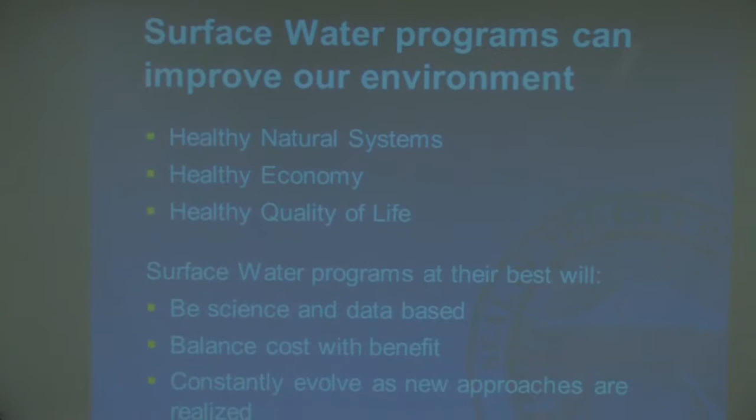So, there we go. I wrote this slide very purposefully, and this statement, I know it's kind of awkward here, but surface water programs can improve our environment, meaning natural systems, economy, and quality of life. And like I said, I was very deliberate about this statement, and I put can in there for a real purpose. That word can could be many words. It might be might, it could be probably, it could be do and does.

And so my point here is that surface water programs at their best will be science and data based. They will balance cost with benefit. They will constantly evolve as we learn new approaches, new science becomes available, and they're realized for application in the field. As a surface water manager, occasionally, I would like to more frequently, I step back from the daily chaos of all the programs that are going on and just think about our program in Tacoma. And does it meet this kind of a standard? Is this the concept that we incorporate into our surface water programs?

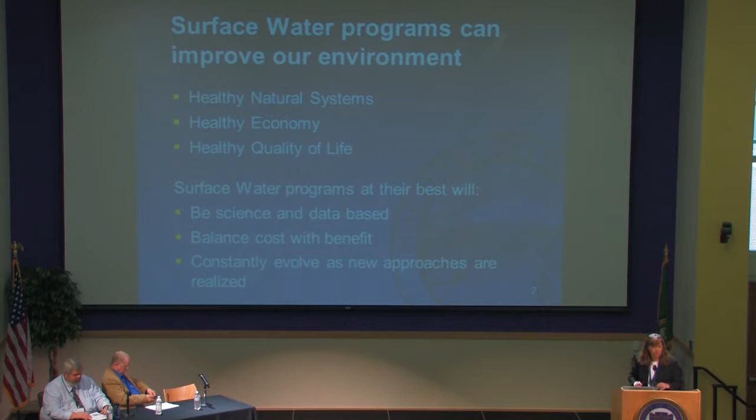And sometimes, maybe you feel this way also, it feels as if maybe we exist to satisfy permit requirements. I don't know, maybe you feel that way, maybe you don't. Some days go like that. But on the other hand, some days go really well, and we're able to move forward and keep the big picture in perspective and develop something really, really cool. And I think a lot of our programs in Tacoma go to the really cool point.

1,500 miles of infrastructure, the pipes, the pumps, are going straight into an asset management program, which is something I am incredibly proud of, but is a big topic for another day. Topic today is, of course, the green infrastructure piece, the LID piece, the treatment piece. And where we're heading in those programs is to retrofits, but retrofits based on science and data. Regional facilities, so that we can improve cost effectiveness.

And we used to have a program in Tacoma, which was the In Lieu program. And my goal, it's not realized yet, but my goal is to resurrect the In Lieu programs, both for treatment and for flow control. Those are programs in which developers can pay into a fund, and then that capacity is provided in the system.

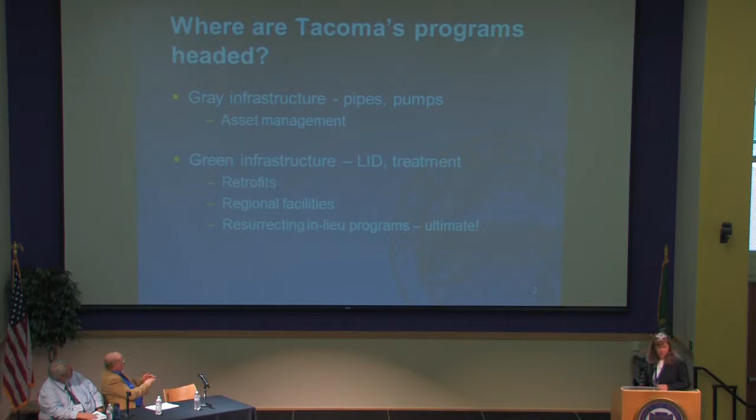So, the evolving practice of stormwater treatment in Tacoma: we've got the current system, which is development and redevelopment requirements. Those are from the manual, and they're imposed on development projects. That generates numerous on-site facilities, which we have to inspect during construction and maintenance, making sure that they're still functioning. But where we want to go is a new focus on regional treatment.

And we want to focus them upstream of Tacoma's most sensitive receiving waters, and I'm talking here about Commencement Bay and the Thea Foss Waterway. By 2015, and this is an amazing number, in Tacoma we will have constructed treatment for 850 acres tributary to Commencement Bay and the Thea Foss Waterway. And so our goal with the surface water utility is to leverage that treatment capacity to support development and redevelopment. And so staff in Tacoma will be pursuing an in lieu of treatment program.

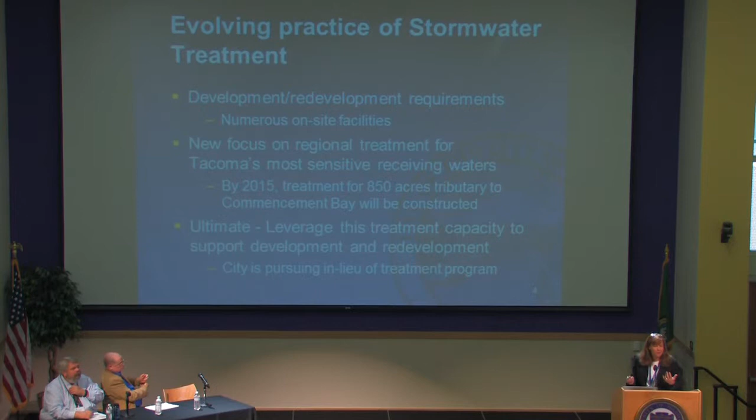And so we've built capacity for treatment, therefore the idea might be that we could accept funds from developers and thus build additional treatment capacity in additional areas of the city with other sensitive receiving waters downstream of areas that are of concern for the land use or whatever.

So how about flow control? Flow reduction. Again, our classic program is the detention ponds, development and redevelopment requirements.

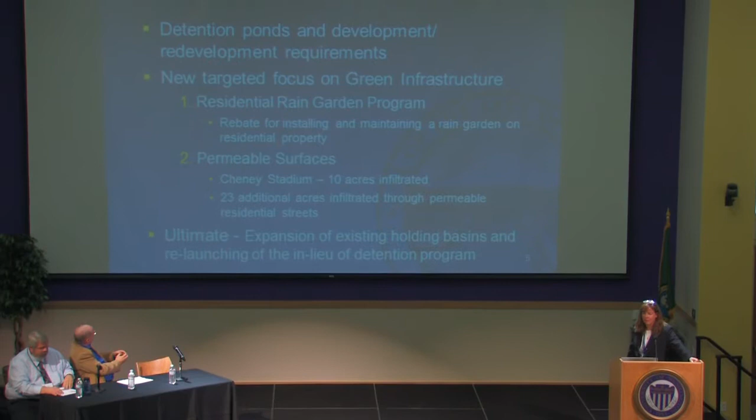But in Tacoma, we have a couple watersheds that are really capacity constricted. And they're the ones that discharge down to Flett Creek and Leach Creek. And so we can expand the infrastructure for sure, dig out the holding basins and all, but we really also need to reduce the flow.

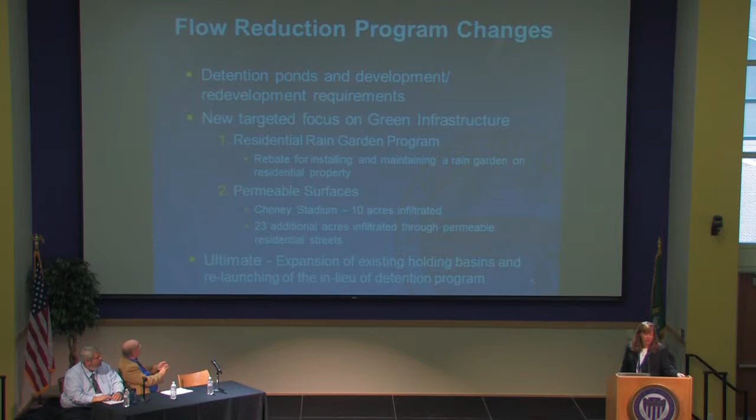And so we've initiated 2 pilot rain garden programs, which were in the TNT. You may have read about them. One is a residential rain garden program, and if you're in these 2 particular watersheds, we will assist you in putting rain gardens on your property and provide you a rebate up to $2,000 to do so. I think we have 4 actual participants at this point.

And it was an offshoot of a pretty big initiative, Healthy Homes, Healthy Neighborhoods, that the Pierce Conservation District spearheaded. And we hope to expand that program in the other watersheds of Tacoma, which are not capacity constricted. We certainly want to promote this program and intend to provide design assistance and soil testing and that kind of thing. But we're really focusing our efforts, not everywhere, but targeted, focused to what the challenge is and what we want to fix.

So anyway, in keeping with the flow reduction, we've also really stepped out with the permeable surfaces. Cheney Stadium, also in the Tacoma News Tribune, an article, and that is quite a cornerstone project. It's 2 phases, and 10 acres of that site is now infiltrating, and that's quite a big deal. In addition, in that area, we have 23 additional acres which are infiltrated through permeable residential streets.

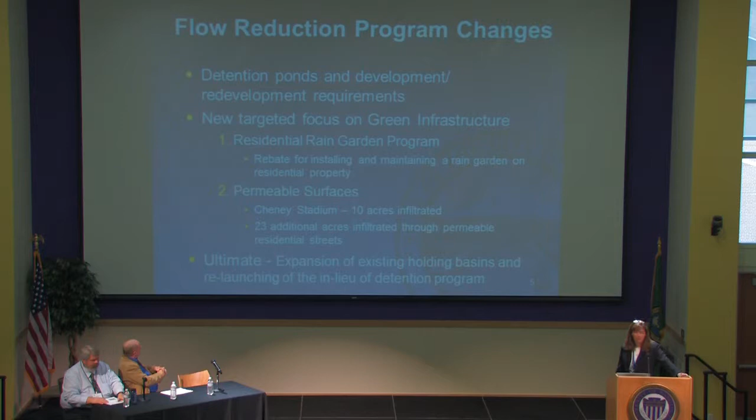So it took Tacoma a while to actually build some permeable asphalt surfaces that cars travel on. But now we've got a few, and we're going to see how it goes. So far, so good. But ultimately, we do have a plan to expand some of our holding basins and again relaunch the In Lieu of Detention program to assist development and redevelopment in Tacoma, and that would be focused again in the Flett and Leach watersheds which discharge to creeks.

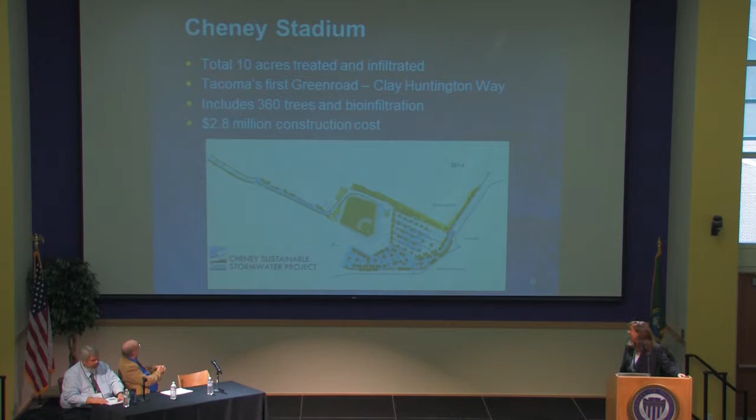So we talked a little bit about Cheney Stadium, and here's a diagram of it. This is a project that is in its 2nd phase, its 2nd year of construction. The blue areas are the permeable surfaces. There's also a lot of trees that were planted, bioinfiltration at $2.8 million construction cost. That was for the full 2 phases of it. Project manager for this project is Jessica Knickerbocker, who is in the audience if you care to have more information on this particular project.

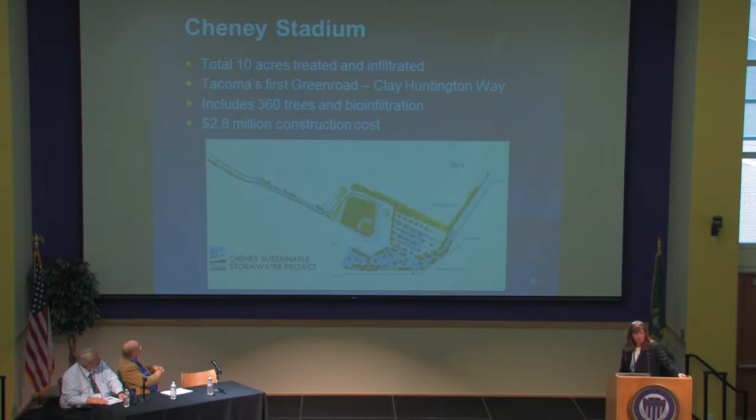Second one I'm just going to touch on here. This will be on the tour tomorrow morning. That's the Pacific Avenue streetscape. I will say that, just to back up here, the Cheney Stadium project is an example of targeted flow control. Sure, there is treatment because the water's going into the ground, we never see it again. But the focus in Cheney, which discharges into the Flett Creek system, is really flow reduction. It's at the top of the watershed, we want to get rid of it. We want to be smart about how we're attacking this stuff, and so this is really flow control based.

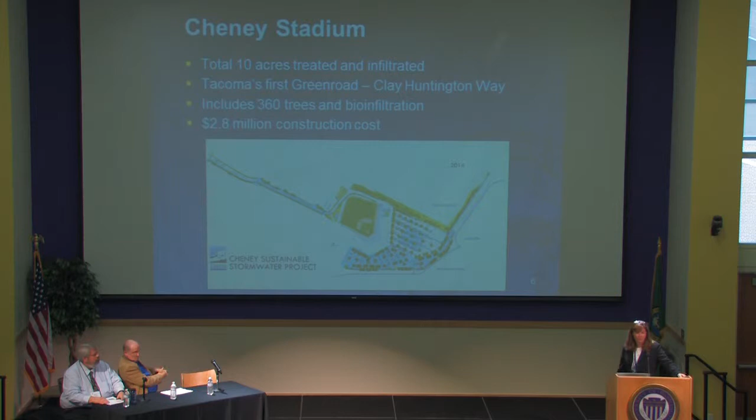But the next one, Pacific Avenue Streetscape, is upstream of the Foss Waterway, and it is really treatment based. It's a treatment retrofit for 5 acres of Pacific Avenue, installed 14 rain gardens, plus some trees and silva cells. That's the first time we've tried those in Tacoma, and we're hopeful that we'll get amazing big trees there. Construction cost, $2.4 million, and this is really a gateway street in Tacoma. It's our main street, if you will.

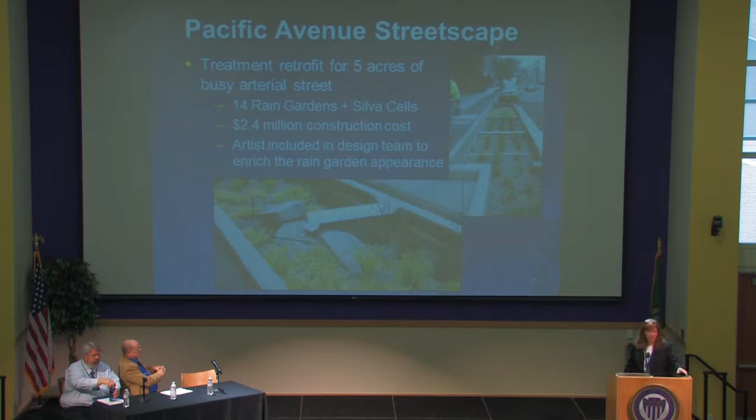And an artist was included in the design team just to add to the form, to make it pleasing and interesting. And when you get on the tour tomorrow, if you are here and want to come, you'll see channelized steel. You'll see some old recycled granite blocks that were actually extracted from city streets, put in these rain gardens, and then of course the plants. And I think there's a green flash or something that's supposed to go in, but I'm not sure if that's quite installed yet. But anyway, that's Pacific Avenue.

So I just want to close kind of with the rationale for going to regional facilities to the extent that we can and where we find opportunities in Tacoma to do so. We want to target those to our most sensitive watersheds and receiving waters. The regional facilities, of course, can enjoy some economies of scale, and we intend to organize them and construct them to support development through a pay-in or an in lieu program. That's a goal. That's the ultimate, just making that clear here.

And so if we are successful, which is not only up to me, but there are regulators who will care about this, we can provide developers with certainty regarding requirements, costs, timelines. So that's my comments.

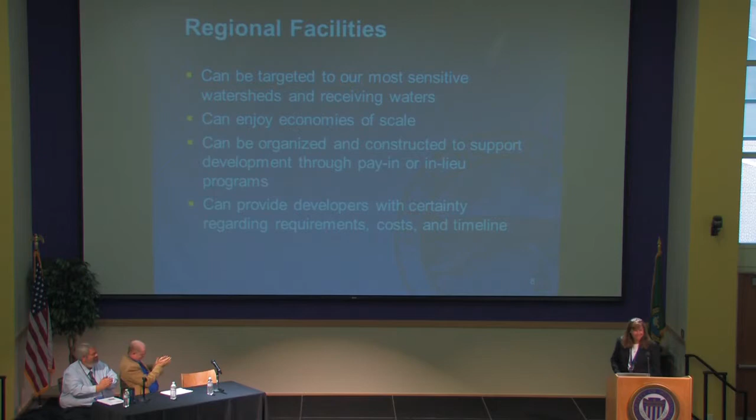My name is Art Castle. I'm Executive Vice President of the Building Industry Association of Washington. Been here almost 3 years, and prior to that, I spent 17 years as the executive of the Kitsap Home Builder Association, where I really got involved in low impact development.

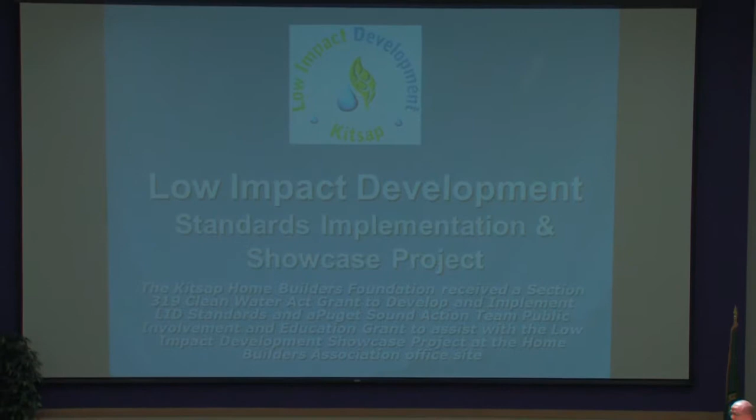A couple of projects we did while I was in Kitsap through our foundation is we had a Section 319 grant to develop low impact development standards for our 4 cities and the county, and we did a several-year process where all the stakeholders, including the tribes, the jurisdictions, private sector, civil engineers, health districts, everybody else was involved in that, and we adopted and created a design manual that was adopted by all 5 jurisdictions without editing. So it was a very successful project.

And along the way, one of the things we did, we had what was then the Puget Sound Action Team PIE grant, and we took a $40,000 grant and did a $200,000 retrofit of the Home Builder Association office, where we excavated everything on the site except the building and retrofitted it, bringing in many of the low impact development techniques to give a showcase of these projects.

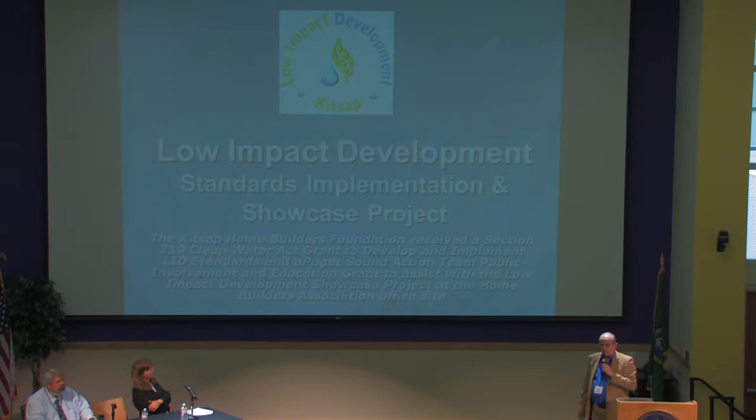One of the things that we found in Kitsap is that by having the project done the way we did, it became the tools of choice in Kitsap County. I liked when I was there calling Kitsap County the low impact development capital of Washington. It wasn't because any jurisdiction was more advanced than some of the other jurisdictions around Washington, but it was a place where all 5 jurisdictions in the development community, everybody was on board and learning how to do it, plus the acceptance in the regulatory process. So when you brought a plan in the counter, you could actually get it done.

So I'm going to talk just some basic stuff here real quickly, and why I think it's exciting. It's exciting and great tools for stormwater mitigation. Stormwater mitigation, you'll probably all recognize, I know from the business side, is the single largest mitigation on any development project. It's most costly. But it has some good things on it too, and I'll talk about this.

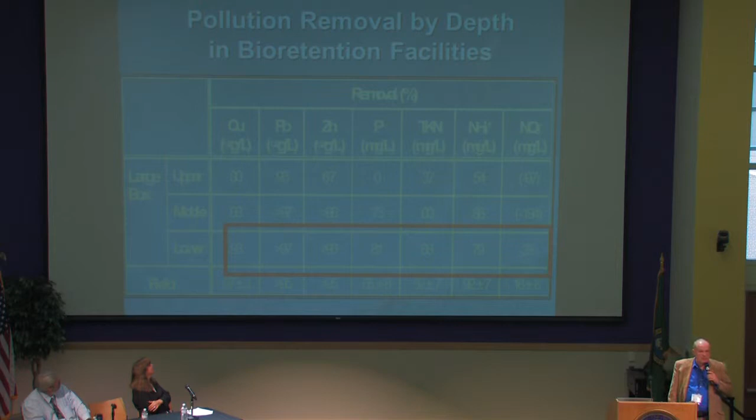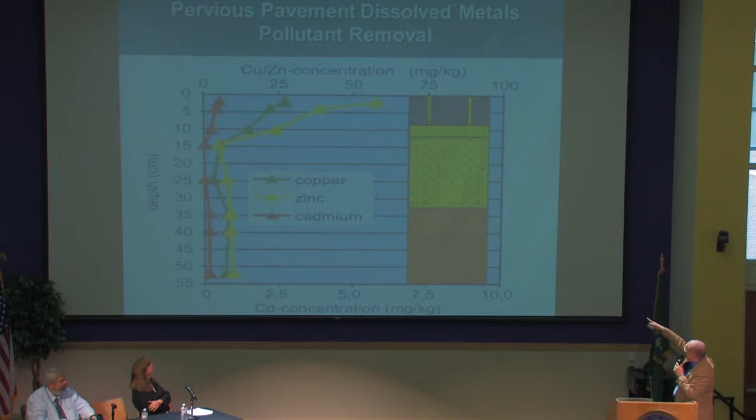Our science, this is some bioretention. The red area shows some of the effectiveness of the pollutant removal. You've seen some other speakers talk about that previously. This is a European university who did some mitigation on dissolved metals, on pervious concrete, pervious with the aggregate base, and as you can see, by the time the water gets back into the soil, it's back to background levels. Very effective at treating that.

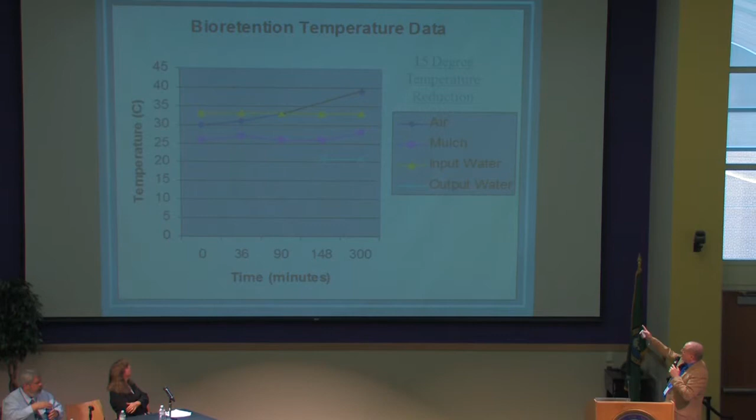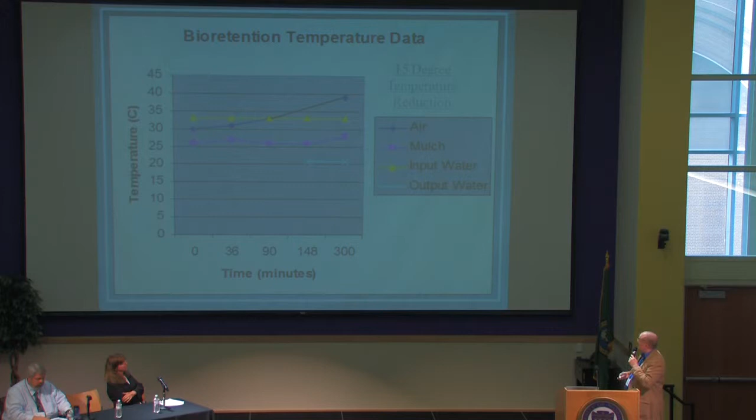Also, bioretention also reduces water temperature, so if you have the natural seep back into a wetland or stream, you're actually now having both the seep instead of the pipe at the end of the pipe, but also the right temperature going back in for the animals and the insects and what have you in that area.

And the work that WSU Stormwater Center over here in Puyallup is doing, the science that they're doing with those, you got to see the pervious pavements and the bioretention. The science that they're going to provide, Department of Ecology, will dictate the regulatory benefit that those techniques are going to provide in the future. So that's something to keep in mind and keep alert there, because it's a very important process. It's probably the best science that's being done on low impact development in the country.

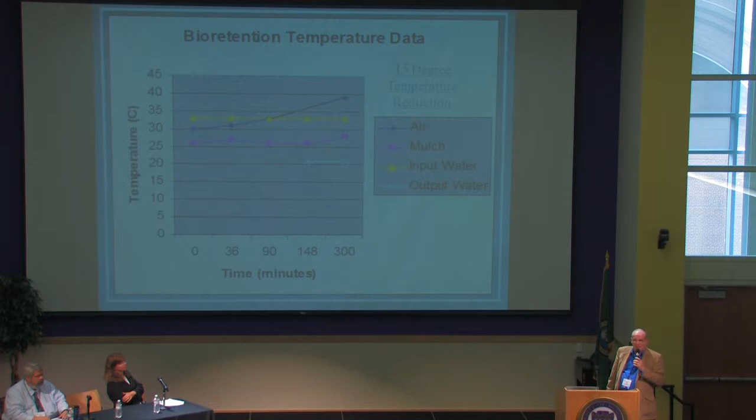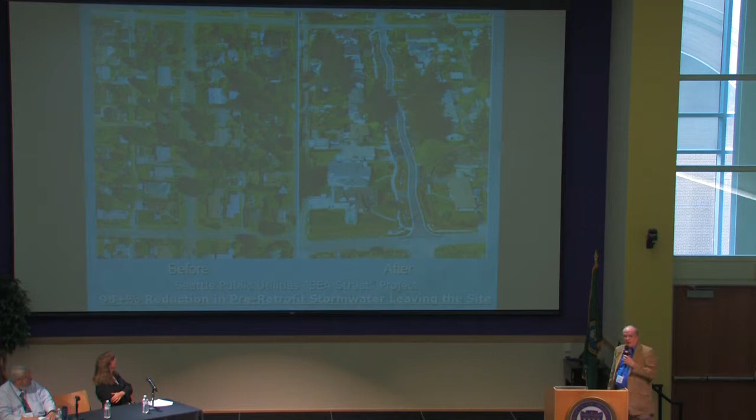So why low impact development? We're essentially wanting to treat a developed environment hydrologically like the pre-development. This is the Seattle SEA Street project, done probably a little bit over 10 years ago, where after they did it, over 98% reduction in stormwater runoff.

So why was it conceived? They're sort of new technology, not the old BMPs. It can reduce the cost of stormwater infrastructure. And one of the things I found in the development community, that when the site accepts it, when the site's appropriate, most every project you can reduce the development cost by using low impact development rather than conventional stormwater BMPs.

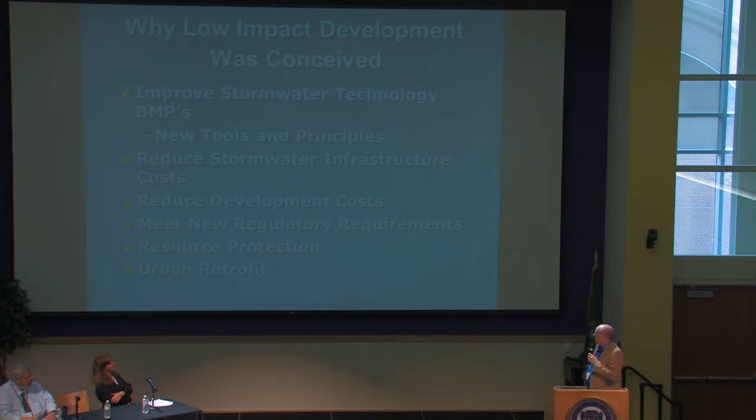I mentioned that it meets the new regulatory requirements, and I'll mention a bit about that. And Damon, who's coming after me, is going to talk a little bit about the NPDES requirement for jurisdictions. But it's also resource protection and can be used in urban retrofit.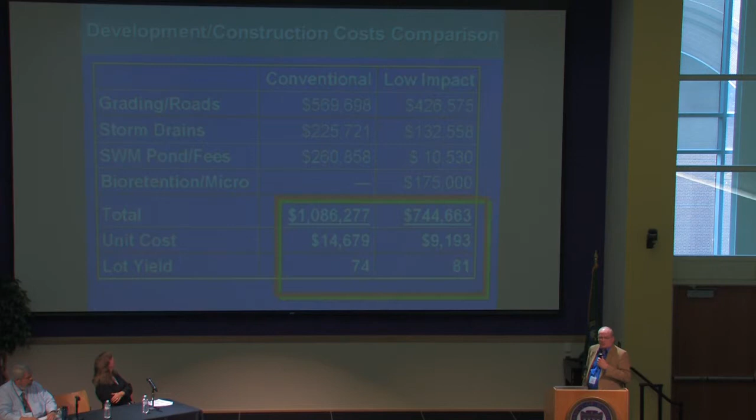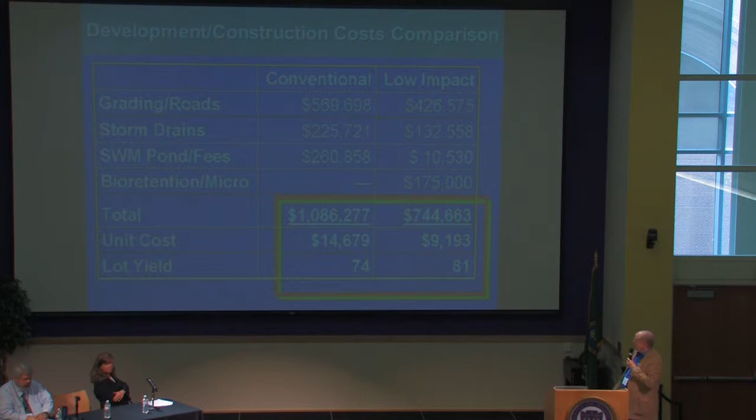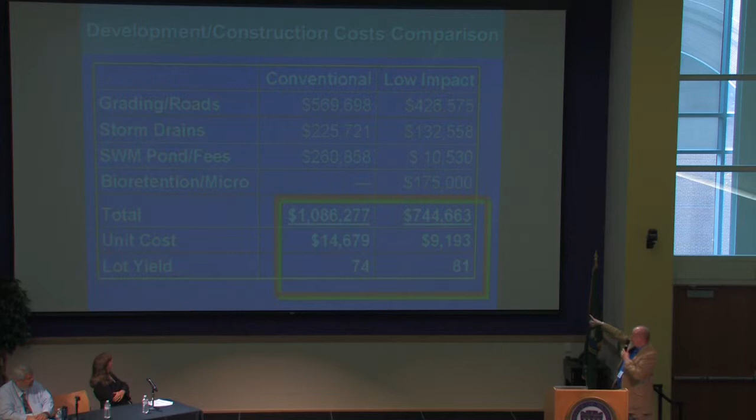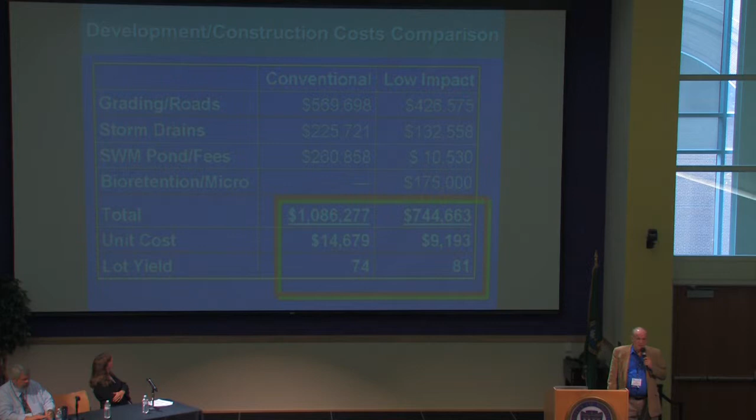This shows a cost on a project done in Maryland several years ago. And I think for a residential developer, this is a very important thing. Using conventional BMPs, this project had about $14,000 in stormwater development cost per lot and got 74 lots. So using low impact development, they were actually able to get 81 lots at a $9,100 cost on stormwater. That's a little bit dated and from Maryland, but the point is that for most projects, especially where you can infiltrate into the soils, there's the potential of reducing net development cost.

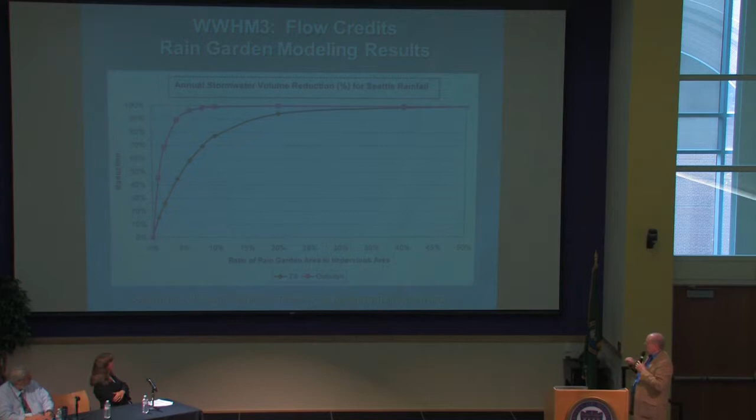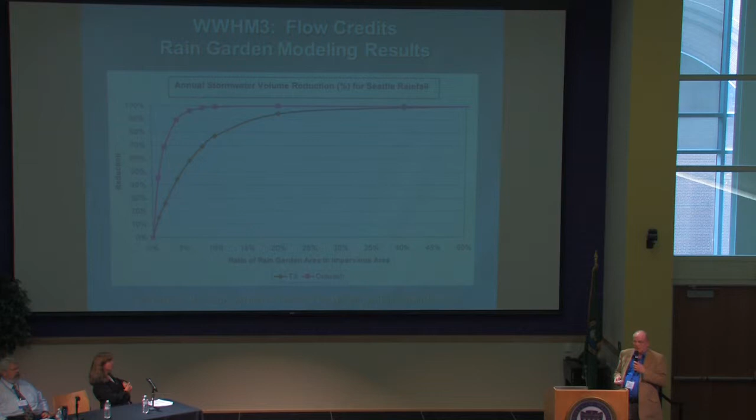This is something that I think most of the engineers, when I was doing the Kitsap project, really got interested in. This shows the ratio of a rain garden area to impervious surface. This was some of the engineering that Curtis Hinman did when they put out the rain garden handbook. Essentially what it shows is, if you've got till soil, sort of difficult soils, and you put a rain garden of 20% of the area of your impervious surface on your site, it'll handle about 95% of the rain that hits your site in a year. And if you've got good soils, at about 10% you get essentially 100% infiltration. It shows you how effective a rain garden can be on volume in addition to water quality.

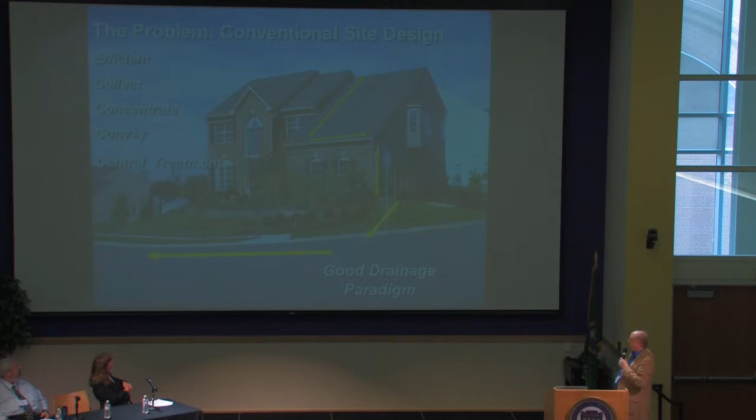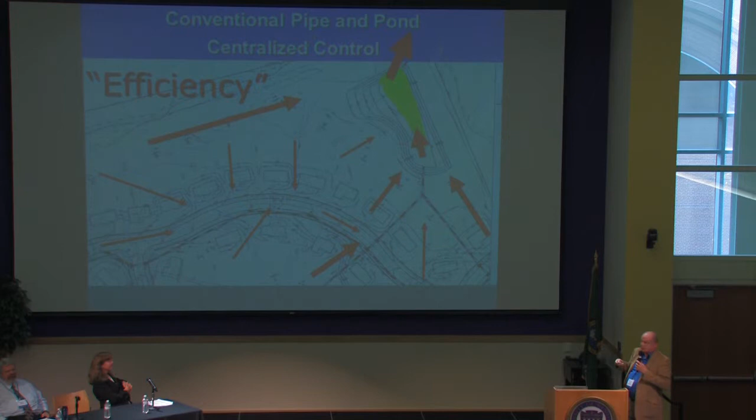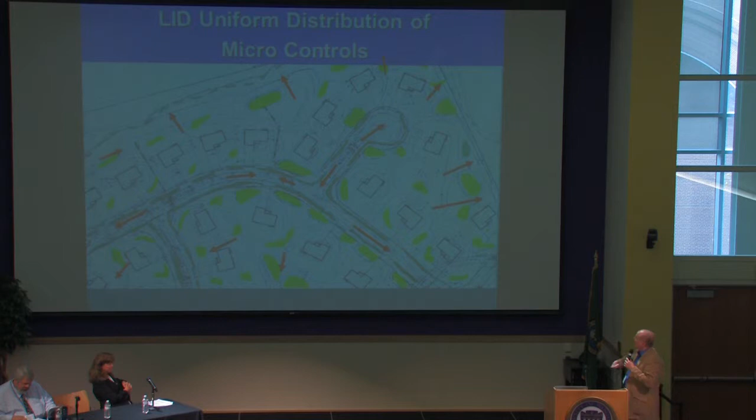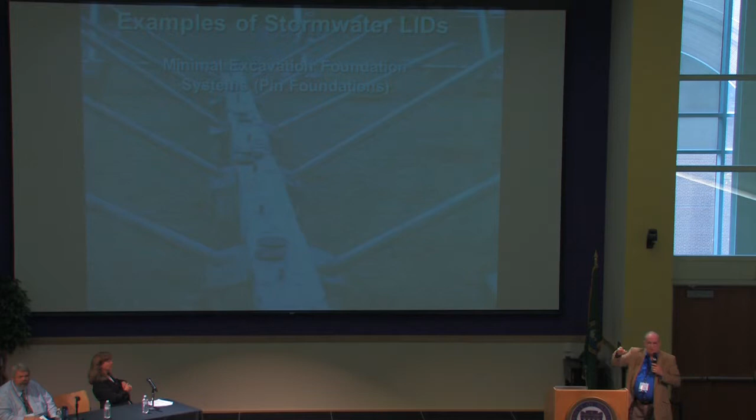Rainwater harvesting: if you are able to do a water budget where you look at the cycle during the year of when rainfall comes in, and then how you're going to use it, and you can zero that out, your roof is then treated as if it's landscaping, not impervious. That's how it's mitigated. Minimal excavation foundation, where you remove the vegetation but leave the topsoil, which is very effective in dealing with volume of stormwater. It's a very effective technique.

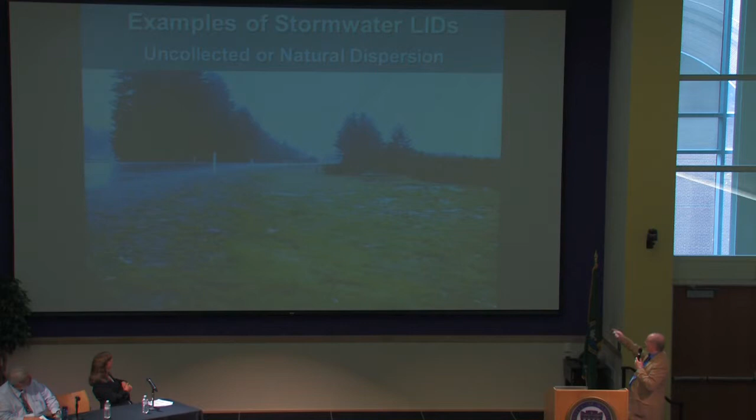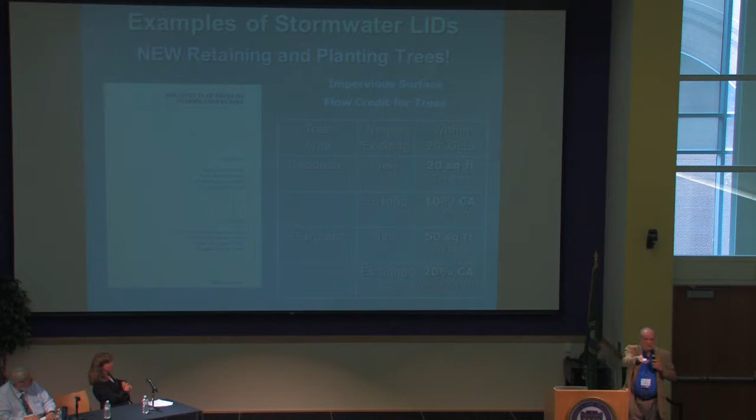Vegetated roofs, surface dispersion. There's a new technique that Ecology's approved recently, and that's a tree credit, where you get credit for the canopy area of your existing trees, or if you replant, you can get some of that. What that does, to the extent you're allowed to use it, is reduce the amount of impervious surface you have to mitigate. These are a couple of things I want to cover in a couple of minutes, and Damon's going to talk a little bit more.

But all Phase 1 and Phase 2 jurisdictions in Washington, that's about 80-some jurisdictions in Western Washington, must now require low impact development where feasible. And each jurisdiction over the next period of time, generally based on their mandatory comp plan update, is going to have to integrate low impact development in all their development regulations.

But the regulatory issues and feasibility: the mandate is requiring low impact development with a hierarchy of BMPs where feasible. And unfortunately, low impact development doesn't work on every site. It can't infiltrate. Sometimes you have soil types or soil layers. These vary by BMP, but infiltration rate of soils, depth of water table, soil suitability, slopes, among others, are some of the feasibility criteria built into the regulatory environment.

One of the things I'll say on that is that I'm a big fan of low impact development. I'm concerned that the mandating, especially on the prescriptive path, could well lead to people who don't know enough designing, or a regulator who may not be familiar enough with low impact development in the science and engineering aspects, and getting installed and having failures. And the failures being blamed on low impact development when it was the mandate, almost a blind mandate. And I have a little concern about that. But time will tell how that works, and I'll answer any of your questions later.

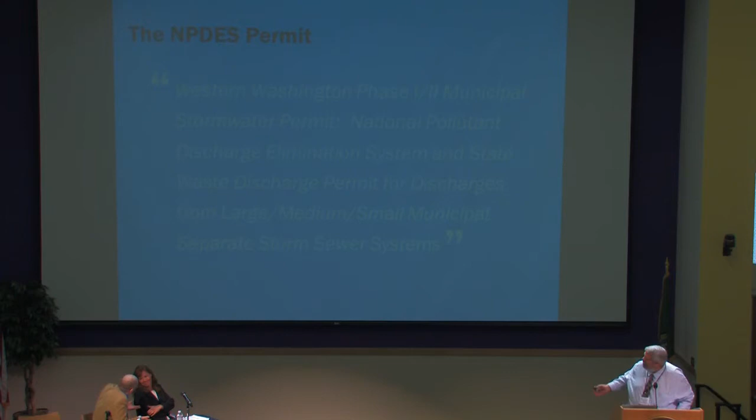It's going to be coming from a local government perspective, but it's also going to be thinking about community impacts down the road, and try to identify business opportunities, potential for jobs and economic development as a result of the permit. It's a little bit different take than you sometimes get on the permit. We hear a lot about how new regulations can stifle development, but there's a lot of new stuff going on with this permit. The permit itself is pretty complex. I mean, even the name of it is complex.

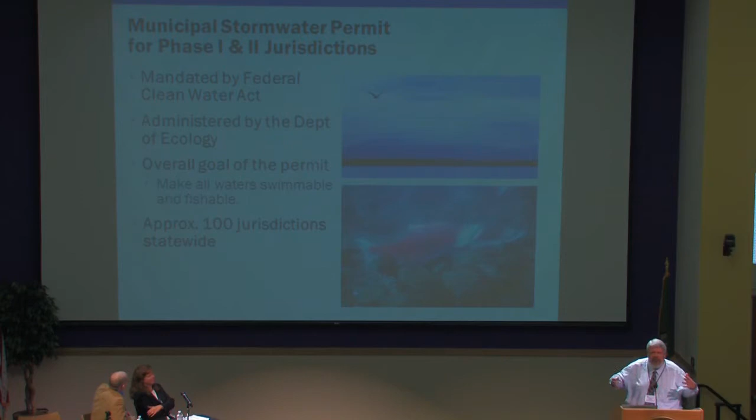So I suspect that most of you know that this is a federally mandated requirement, the NPDES permit that the state puts out and gives to local governments. That's a result of the Federal Clean Water Act. These permits and all this stuff that we're finally doing was anticipated in the 70s. We're finally getting around to it. As I mentioned, the name's complex, but the permit itself's got a real big thud factor with it. The permit's 70 pages. It's got a bunch of appendices attached to it.

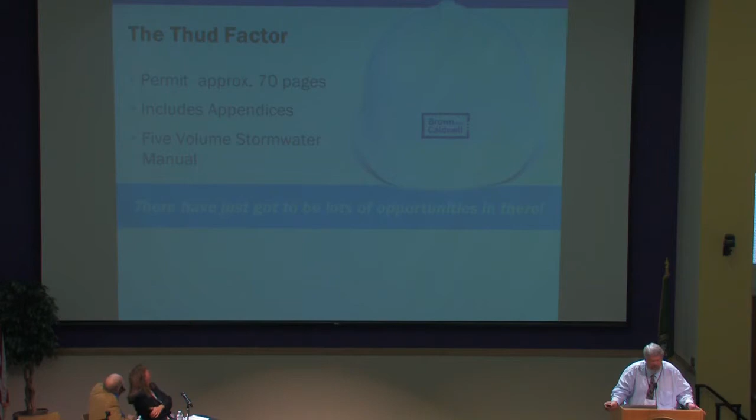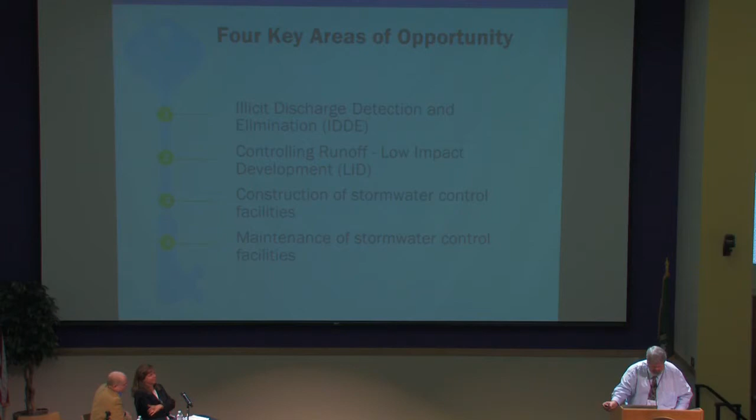There's a 5-volume, 1,000-page stormwater manual. There's an LID manual, a rain garden manual, an O&M manual, a land use principle guidebook, and there have just got to be a lot of job opportunities and economic development potential in all that stuff. So when we start taking a look at it, we see that there are at least 4 main areas where we can look for that kind of opportunity. One is illicit discharge detection. Another is controlling runoff and low impact development, which we've heard quite a bit about.

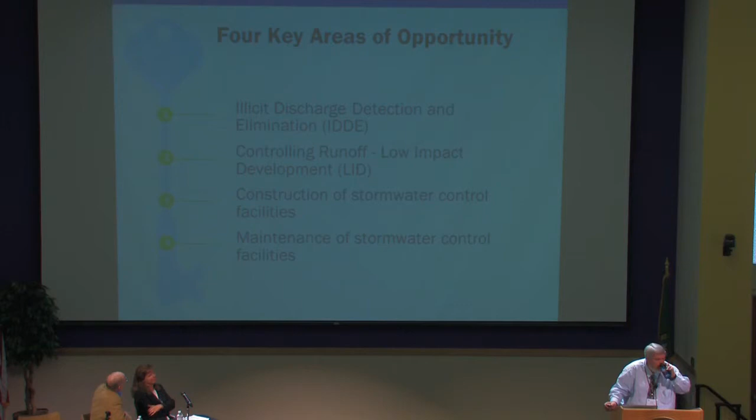Construction of stormwater control facilities, and maintenance of those stormwater control facilities. My big caveat is, as we speak, negotiations are going on with appeals to the permit. Your mileage may vary, but what's happened in the past with appeals is the body of the work stays pretty much the same. We change some things around the edges, we might delay some things, but in general, this stuff is coming to a neighborhood near you fairly soon.

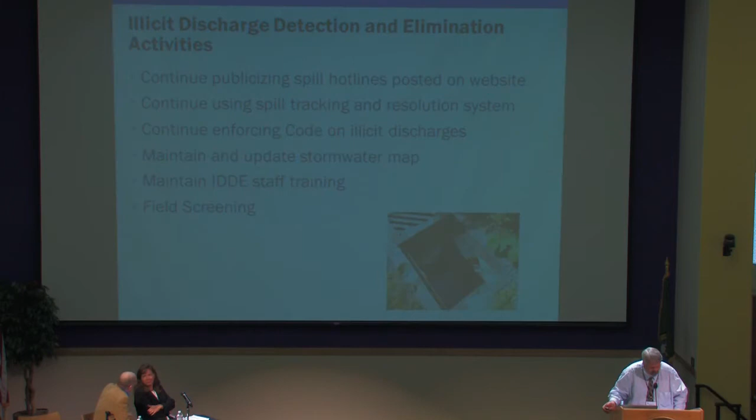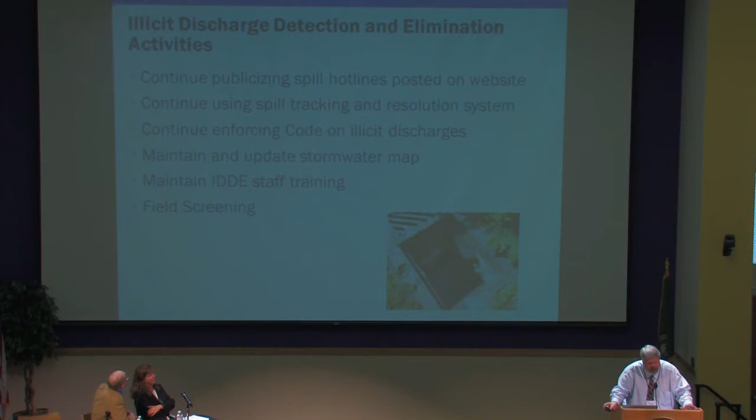With illicit discharge detection and elimination, most local governments are doing a lot of this stuff already. I won't talk about the continue part. There will be some opportunities for private sector jobs and firms that do stormwater mapping. There's going to be opportunities for illicit discharge detection and elimination training. And there may be some opportunity for field screening, particularly with some of the other maintenance kinds of things I'll be talking about later on, where we can expect some private enterprise participation.

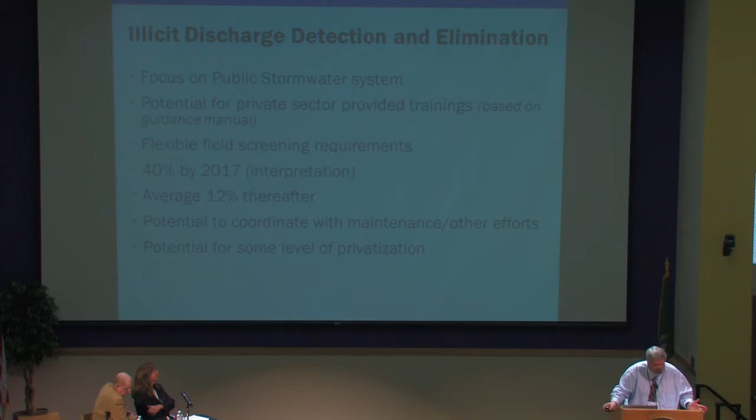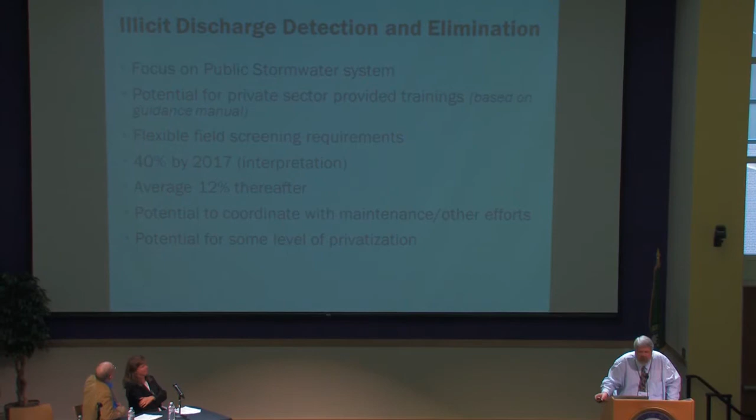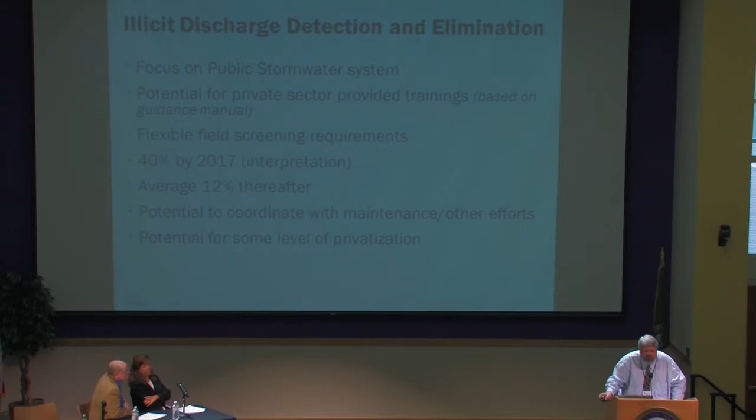With the illicit discharge detection and elimination, of course, we're trying to track down pollutants and remove them. There are the new flexible field screening criteria, and the local government, from a policy perspective, needs to think about what inspecting or surveying 40% of their system by 2017 means. Is that 40% of your catch basins, or 40% of your pipes, or 40% of the land area that drains to it, or, now we'll get tricky, 40% of the inch diameter miles? What is it?

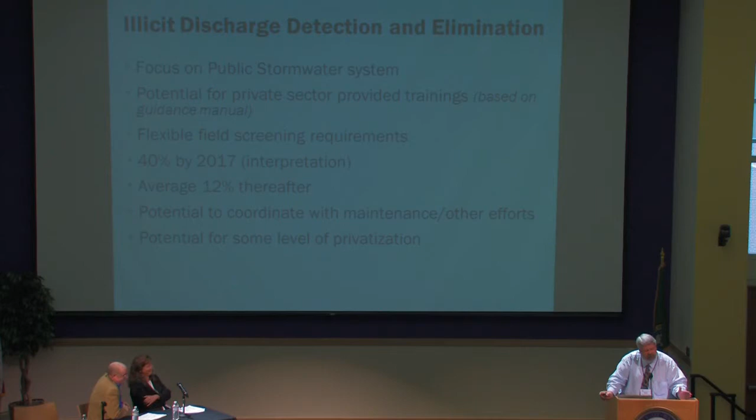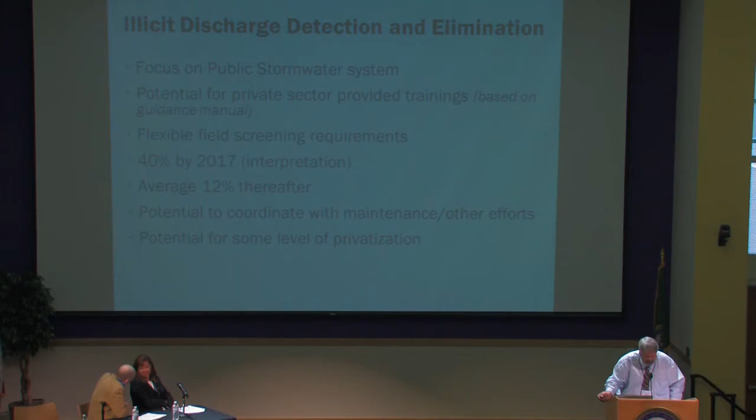And so what you need to do as a community, as a local government, is step back for a second and think what makes sense for you, both in terms of what you can afford over time and what gets you to the basins you want to get to. There are a lot of different ways to look at it, and there is going to be some potential for some level of privatization in some of that work.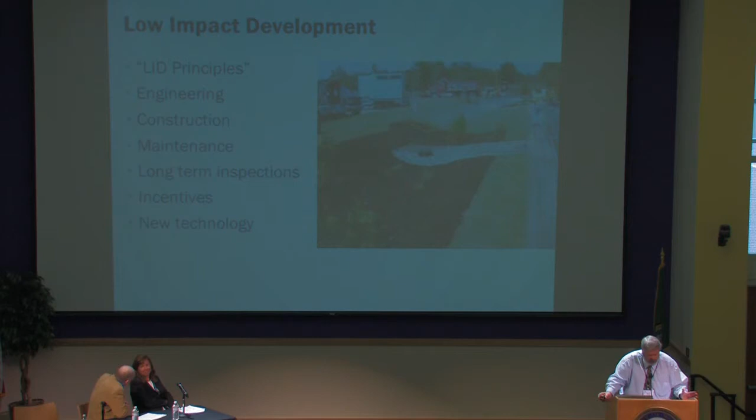Low impact development is really the linchpin of the new permit from where I'm sitting and from what I hear from our clients and what we work with our clients on. All of these elements present some kind of job opportunities or business opportunity, from the LID principles to the engineering to construction, maintenance. All of these and the new technology have some level of economic development interest. On the other hand, the LID principles are truly, I think I heard the phrase, a real paradigm shift. This is a change in philosophy.

That wasn't working. So what we're talking about now is a real shift where before we do our planning, before we do our comp plans, before we do our zoning, we figure out what the impacts are going to be to the water resources and try to figure out how we can set up our structure around that. It's a real shift. And as a result, there are going to be some really interesting policy decisions for local government. Things like trading off parking standards and perceived economic development associated with big parking lots against vegetation preservation, skinny streets, minimizing impervious surface and runoff versus having roadways that are deemed safe to travel on and allow for emergency medical access.

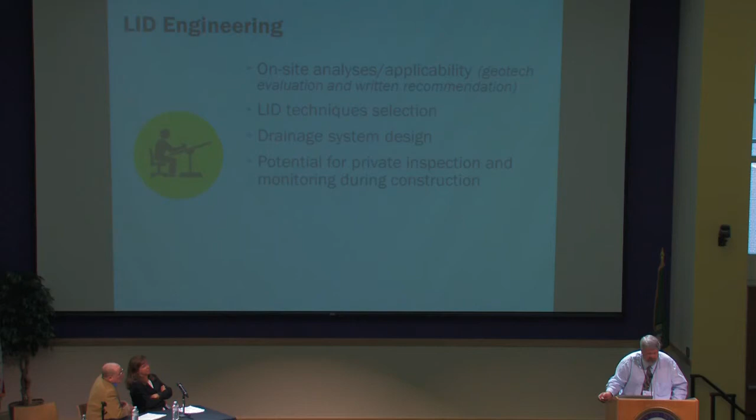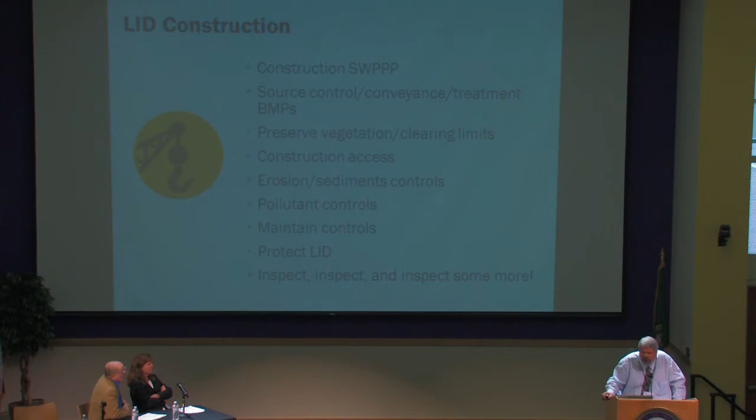There are a lot of things that you have to figure out as you're trying to implement LID and do your drainage system design. In LID construction, we're going to be having more stormwater pollution prevention plans developed as part of the construction. We'll have to keep doing source control, conveyance, treatment, best management practices. We're going to be more careful about how we preserve vegetation and how we mark those.

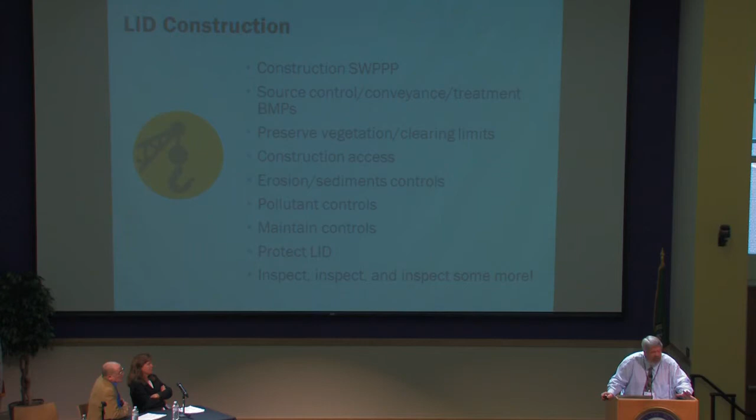We're going to have pollutant controls and maintenance controls. We're going to have to maintain them. We're going to have to protect the LID systems as we build them, and we're going to inspect, and we're going to inspect, and we're going to inspect some more. And with that, we're also going to have a whole bunch of LID maintenance. All of these things, it's kind of new maintenance techniques, and it's going to involve significant increased effort.

And we need to think about how we're going to do that, and where are these people going to come from who are going to do all this maintenance? Remember, we're looking out 50 years, and every property's got one of these, and every property needs to be inspected. Where are these inspectors going to come from? Who are they? Who are they going to work for? Are they going to work for private industry? Are they going to work for local government?

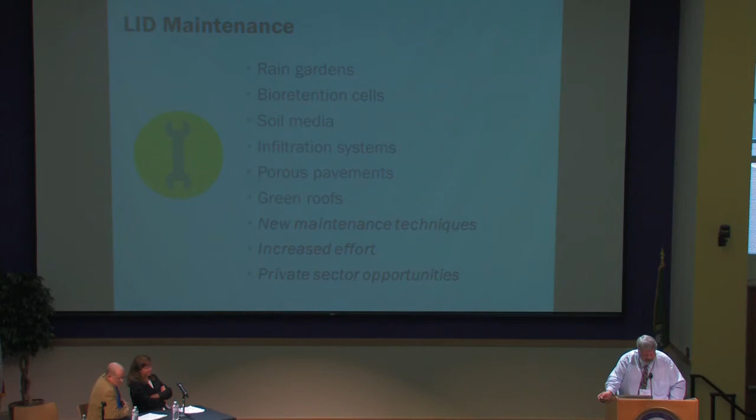Local governments are going to... When was the last time you heard a local government say, "We have plenty of inspectors, thank you"? That ain't the way it is. They are already maxed. This is new stuff. This is new jobs. These are new people. Long-term inspection, it's just going to be a huge, huge new work effort when we start looking out and doing some strategic planning out to the horizon.

So for long-term inspection models, we can look to other industries. In the wastewater sector, we've got the fats, oils, and grease program to keep from plugging up our sewers and backing sewage into our buildings. We've got water supply backflow prevention programs that have been in place for years. And in stormwater management, a whole bunch of jurisdictions around here have been doing private drainage inspection.

But there are a lot of options as we see how all of these things are done across the U.S. Is it going to be done by the public sector? Are we going to privatize some of it? Are we going to allow for self-certification where property owners go out and look at their system and say, it's good? Are we going to do combinations of these? And there is potential for a lot of privatization opportunities. And also we have to figure out how we're going to pay for this. Does this come out of stormwater rates?

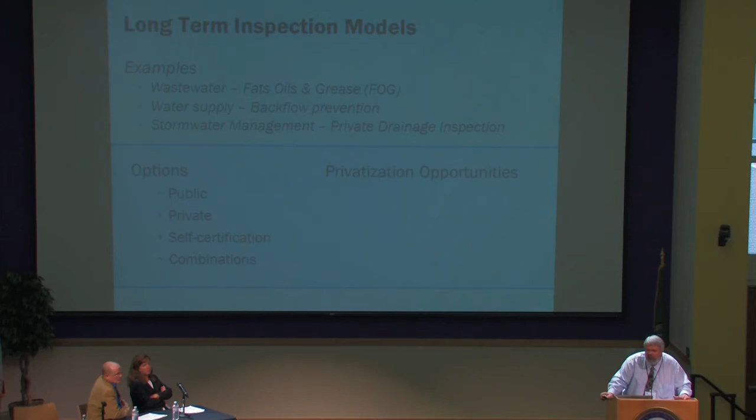Do we do an inspection fee? Do we put surcharges on drainage systems and their drainage rates if they don't maintain them properly? How are we going to do all this stuff? A lot of policy decisions.

For long-term inspection and all these technical people that are going to be needed, there are going to be huge training needs, and there are going to be a lot of ways that training can be given. Eventually we're probably looking at moving toward some kind of a stormwater technician certification series. How do we do that? Is that going to be through the state's trainings, their public trainings? Is it going to be through colleges, universities, private companies? What's going to happen?

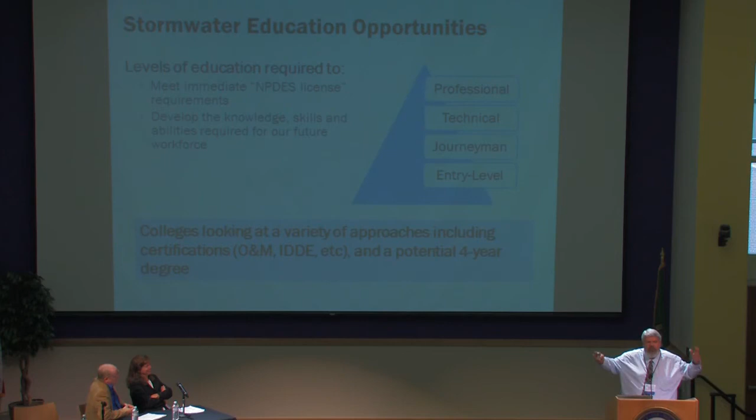I can tell you where some people are trying to get out in front of this now. Some of our colleges are taking a look at the need to come up with an NPDES license, for lack of a better term. The colleges are looking at a variety of approaches and starting at the foundation of all this stuff. I mean, planners and policy people, we're figuring it out. But at the foundation, there are people out there who have to maintain, operate, construct, and manage these things in the field. And those folks are going to have to get some training.

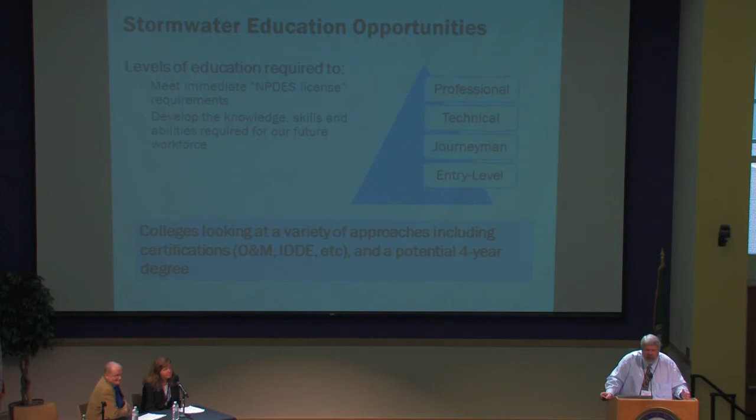And then this slide shows them as journeymen. I think a lot of our jurisdictions call them skilled workers, folks who direct the other work, plan it. They're going to need to be trained. We're going to have more technical people that need to be involved, and we're going to need to bring on a new generation of professionals, of engineers, of stormwater managers who are going to be trained and ready to go with this new reality.

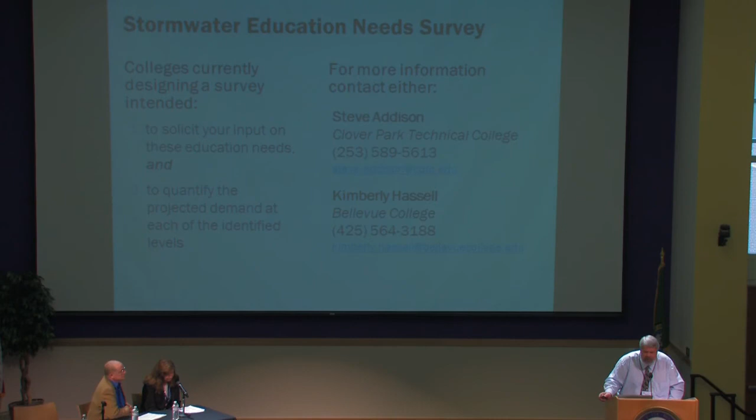So, to that end, some of the colleges are getting together and trying to figure out what these training needs might be. And the first thing they're going to be doing is trying to figure out how big the need is. They're thinking about putting together a web-based survey, and they would like some input from you all, people you know, people in the industry, business. Two of the main people involved here are Steve Addison with Clover Park Technical College here in Pierce County, and Kimberly Hassell with Bellevue College.

For those of you who work for government, there are a couple of folks who have been kind of rabble-rousing, if you will, to get this effort going. Kit Paulson with the City of Bellevue and Joan Lee with King County have been working on this too. So if you're at all interested or you think you have input, please contact these folks. They're looking not just for input, but also for partners, for people to help move this forward so that we can get people trained up to take these new jobs that are on the horizon in this new stormwater reality.

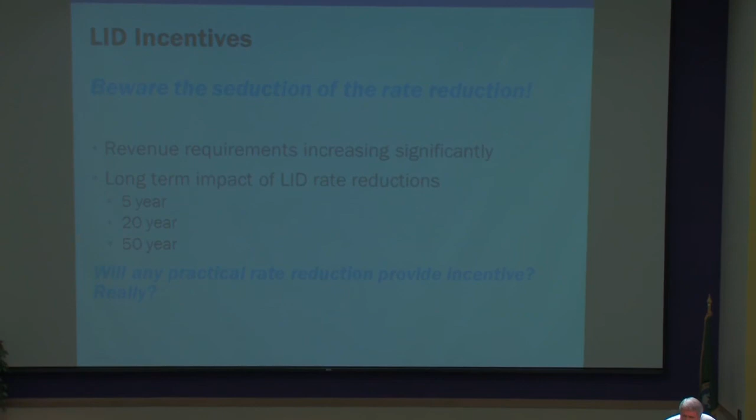I would be remiss if I didn't say something about LID incentives, because we hear a lot about that. How are we going to get people to do LID? And my apologies, Ben, but I look on the EPA website, and the number one thing is stormwater rate reductions. You need to think about that. When you're starting down that policy road, you're heading into a new era of stormwater management where there's going to be nothing but increases in needs for stormwater resources. And you're also entering into an era where everything's going to have LID on it. Do you really want to start giving LID rate breaks? The long-term consequence of that is you can end up holding an empty bag and a whole bunch of LID that you can't take care of.

So you might want to think about other kinds of rate or LID incentives, density credit stuff, landscape standards, economic development grants, low interest loans, maybe some kind of a water quality rate component before you head down the stormwater rate reduction path.

We heard earlier today about private sector involvement in developing new technologies. I won't say any more about that. Public sector has always been involved in that. We heard about DOT's efforts in that area. One thing I want to say about the local government role in new technology is, as you're starting to develop this stuff, if there are problems, if you see difficulties, sound the alarm. We don't need a whole bunch of people following lemmings off the cliff. If it ain't working, don't do it anymore.